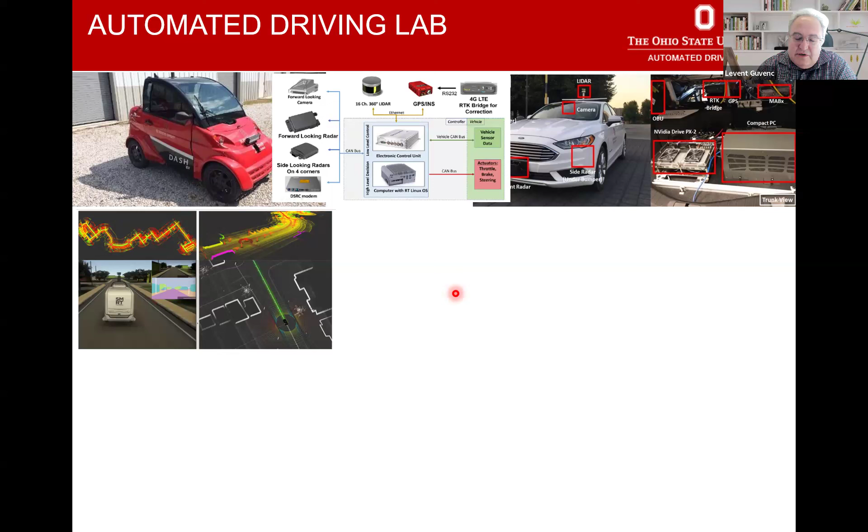Along with that work, we started building this vehicle in virtual environment method, which I'll talk about also in this presentation. We built hardware in the loop simulation systems like this one, which are innovative in that we add things like real traffic signal controllers, real onboard units, real roadside units, electronic horizon units, and the like into our simulations. We can actually play back real connected vehicles data or simulated connected vehicles data and insert our own connected and autonomous driving research vehicle inside that information and sense that information.

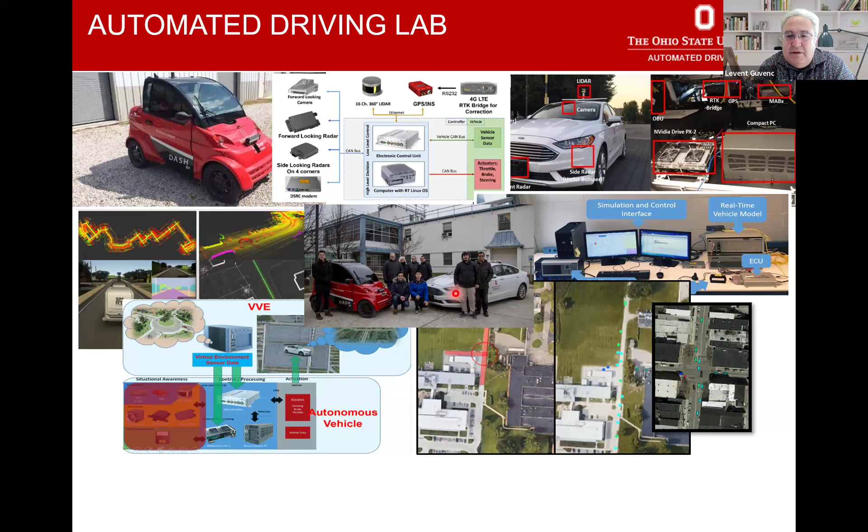There were a lot of graduate students and postdoctoral students, as you see some of them in the picture, and most of them are working either in academia or in industry. Accordingly, our work has been funded mostly by the industry and also federal sources.

So let me start with the motivation for today's talk. Vulnerable road users and vehicles share the road. We all share the road together. We have to improve our mobility, but there's a problem. Unfortunately, the injury and fatality rates of pedestrians and bicyclists has been in an increasing trend in the US for a long time. There are similar statistics worldwide.

So people are working, researchers are working on trying to actually improve the situation. And as you see right here, the trend has been increasing. There was a slight decrease based on preliminary data from 2023, but the decrease was not enough. We definitely want this decreasing trend to continue and at a much faster pace.

So what can we do about this? NHTSA, National Highway Traffic Safety Administration, has of course been posing the same question, and they've been analyzing crash data, and they've built this fatality analysis reporting system, FARS crash scenarios. On the left-hand side, you see the main causes of pedestrian crashes, and on the right-hand side, the main causes of bicyclist crashes.

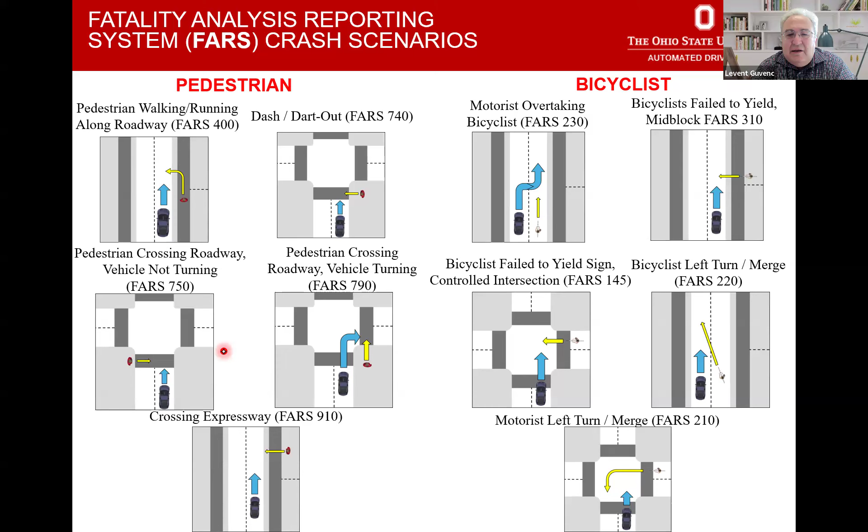So the first thing we did in our two projects that are related to this talk for the Safety 21 UTC were to actually create these scenarios in simulation settings such that we can actually simulate them and then use them for development and testing cases for our vulnerable road user safety algorithm. So we mostly concentrate on the pedestrian ones until now, and we have started working on the bicyclist ones in our second year project, which is the one that is current.

If we take a look at what is available today, pedestrian and bicyclist injuries and fatalities are increasing. Autonomous vehicles were seen many years ago, maybe at least a decade ago, as the solution, since driver error would be taken out of the loop and these kinds of accidents would not occur. But unfortunately that has not been the case, so more has to be done.

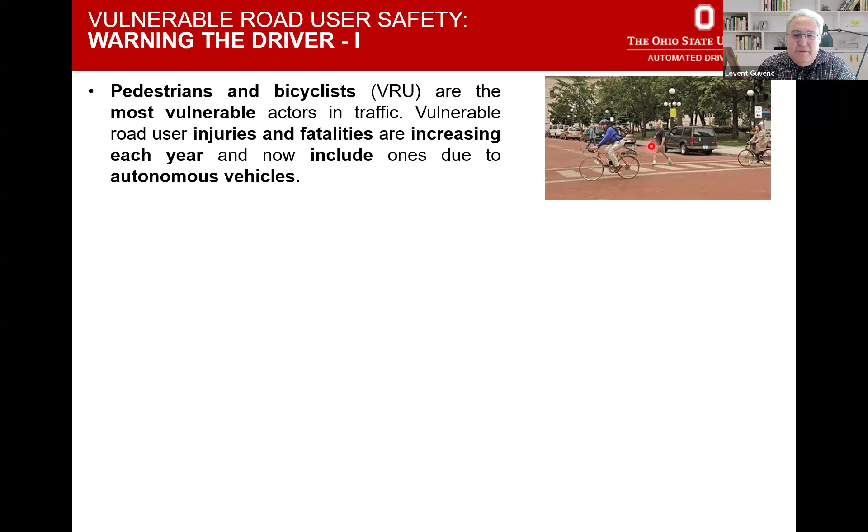Our vehicles actually come with some kind of emergency braking system. They have radar and camera that can detect pedestrians or bicyclists. But there are still cases in which these sensing capabilities do not work too well. So the question was, what can we do on top of what is available to help in improving the safety of vulnerable road users?

One problem was non-line of sight or reduced visibility conditions, where basically those available sensors do not help you too much. And it turns out these are usually a large percentage of crashes that result in fatalities.

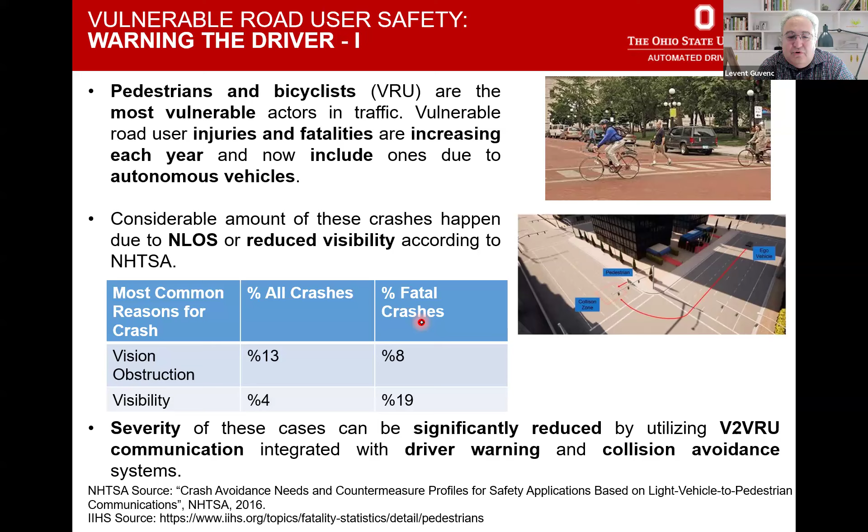So one idea is to add, on top of the sensors already available in your car, some kind of communication capability like vehicle to vulnerable road user communication, and use that to understand where the pedestrian or bicyclist is, or either warn the driver or warn the vehicle such that it could do a better job of braking or braking assisting. So this was the idea.

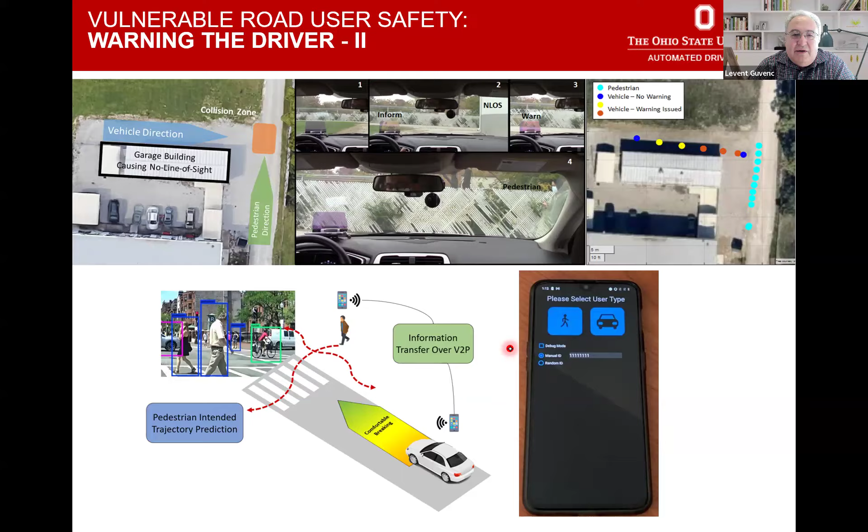Instead of trying to come up with new infrastructure, since almost everyone has a smartphone, use the smartphone of the pedestrian or bicyclist, and maybe the one of the driver, for the communication such that results can be achieved right away. So here's the idea: you have the pedestrian smartphone and the corresponding smartphone of the driver in the vehicle. They communicate, in this instance, over Bluetooth.

But the ideas I'm going to talk about are agnostic of the communication method. We also tried cellular communication. Colleagues we work with added modems to infrastructure like traffic lights, and then broadcasted the information from the pedestrian phone, which increased range. We also wrote directly to cloud servers and read from cloud servers. It turns out that all of these methods work fine.

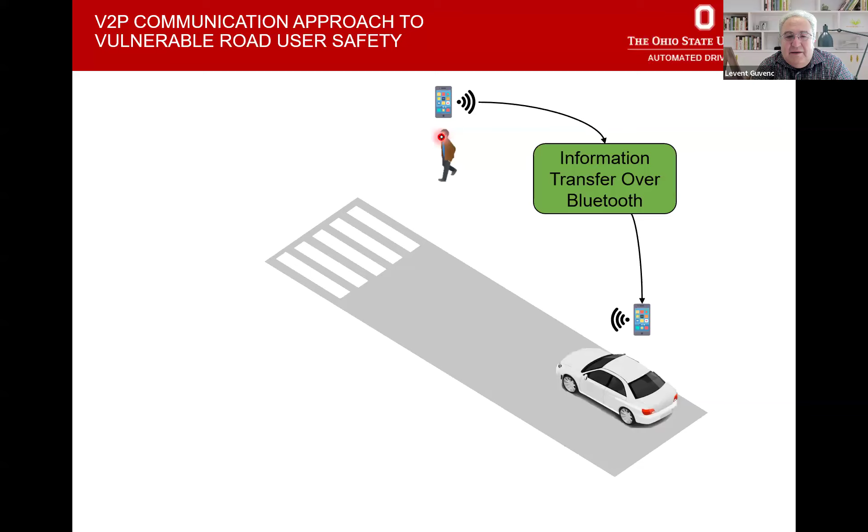The latencies are not big enough to affect performance. So basically, this communication between vulnerable road users and vehicles is not a bad idea. Then we need to somehow predict the path of the pedestrian or bicyclist, especially for pedestrians. This is a little bit tricky, whereas for the vehicle we usually know what it is going to do.

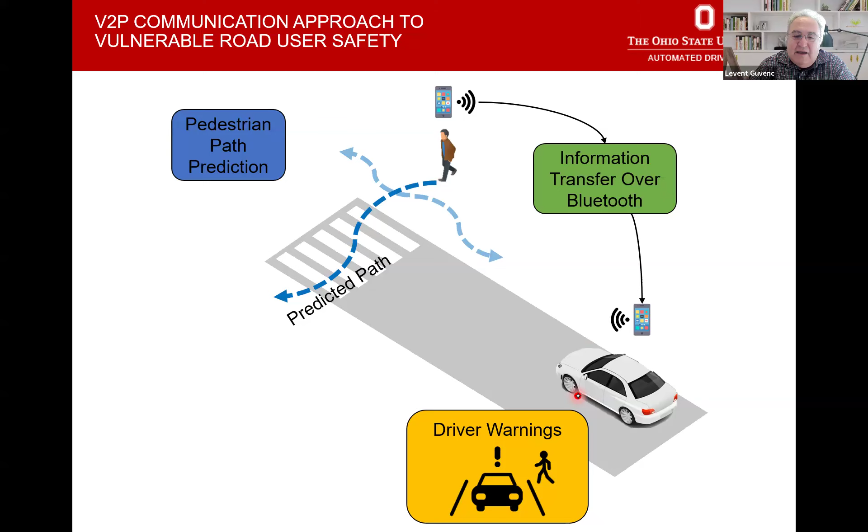Based on that communication and computations, we send warnings to the driver such that the vehicle can do comfortable braking. To be able to send the warnings at the correct time, or to do emergency braking more naturalistically, we take a look at real-world data for analysis of interactions between vulnerable road users and cars.

So let me go back to this Bluetooth idea. For the experiments, we used an Android phone, and we did a lot of experiments with different methods. Instead of just using this rather recent Bluetooth 5.x technology, which is much faster, we also looked at older Bluetooth because not everyone is going to have the latest kind of smartphone.

It turns out that even if the pedestrian or bicyclist is placing the smartphone in his or her pocket, which reduces range obviously, the numerical values are not bad. And technology is improving, so communication is not going to be that much of an issue. Here are some simple experiments to show that this idea could work.

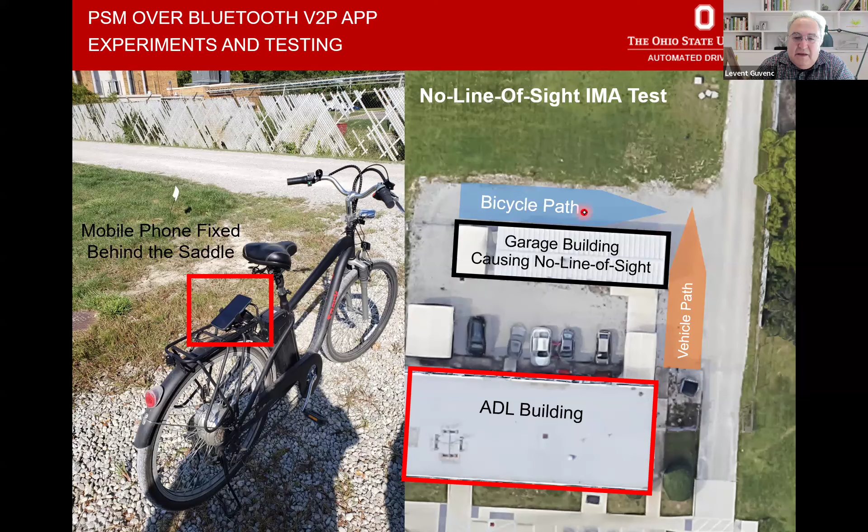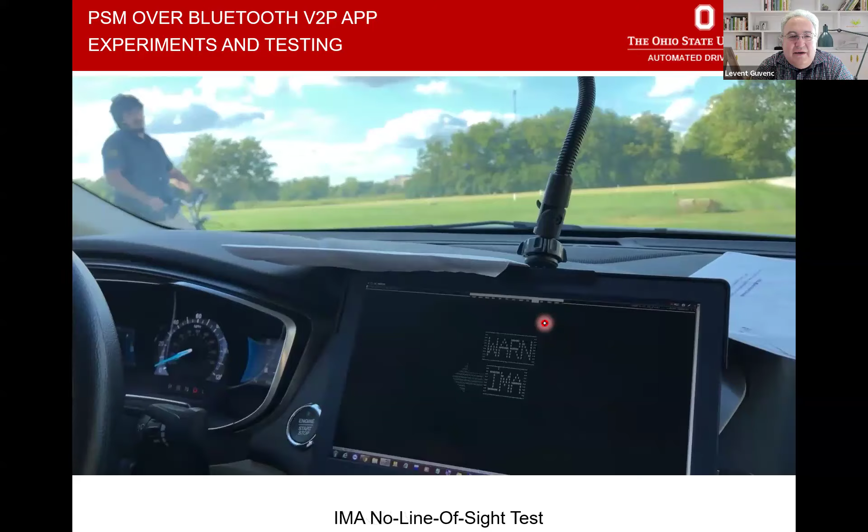At first, we used available connected vehicle applications like the intersection motion assist, in which the vehicle obviously does not see the pedestrian that's going to appear from the left side of that building. There is going to be a warning which you should see, and obviously a collision is going to be avoided. This is a non-line of sight case.

Then you can also do line of sight cases at a larger distance, where the bicyclist will be coming from a longer distance. Again, your sensors might have some difficulty because that bicyclist or pedestrian is a long way away. Same intersection motion assist scenario.

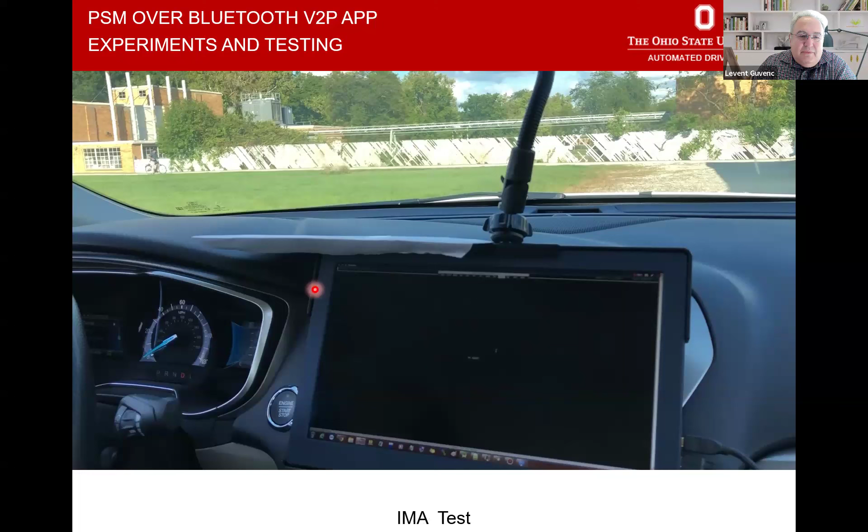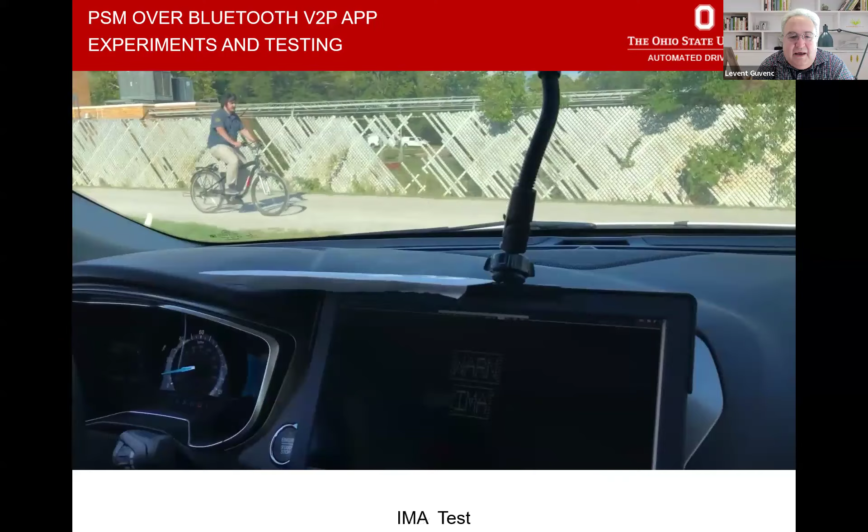So basically, it's the same scenario. You might barely see the bicyclist on the left corner, and then there is going to be a warning flashing. And if you don't want a warning, you can actually connect that warning to an emergency braking system.

So that's the idea. We did not want to just use existing algorithms. The intersection motion assist algorithm is an existing algorithm from the connected vehicles database, but we wanted to build our own algorithms. We also wanted to use some very basic learning control.

So we had to collect data, and what better way than to use this smartphone right here. Either the pedestrian or bicyclist has it, or you can put it in the car, and that can be determined automatically. It turns out your phone has a ton of sensors, like a very good GPS sensor, IMU sensor, and others, so you can collect data. This is an actual pedestrian moving around, and I use that data for later analysis and also for training neural networks.

So we decided to test both a Kalman filter and some very simple neural networks, long short-term memory networks, which turn out to be what most people use, especially for future motion prediction of pedestrians. We used a 1 second ahead prediction and a 2 second ahead prediction. Why did we use such simple algorithms? Because we wanted to make sure we could implement them on the smartphone.

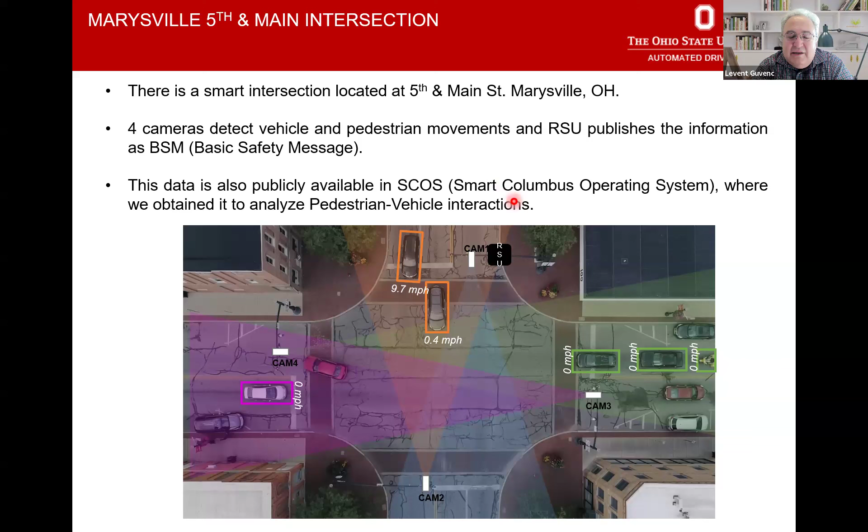So we could go there, and we did this, listen to this broadcast with our car, and collect the data. And it turned out that the city had actually collected about 9 months of data, which was made publicly available.

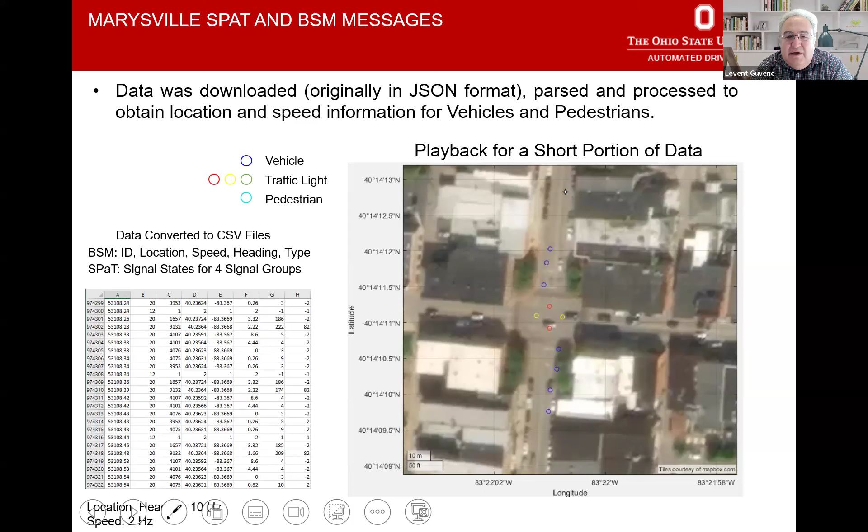And then we decided to actually analyze the data. Obviously, 9 months of connected vehicles data is a lot, 24 hours a day for 9 months. So we had to write some semi-automatic or automatic tools to extract the close vehicle and vulnerable road user interactions. This is from August, this is from September.

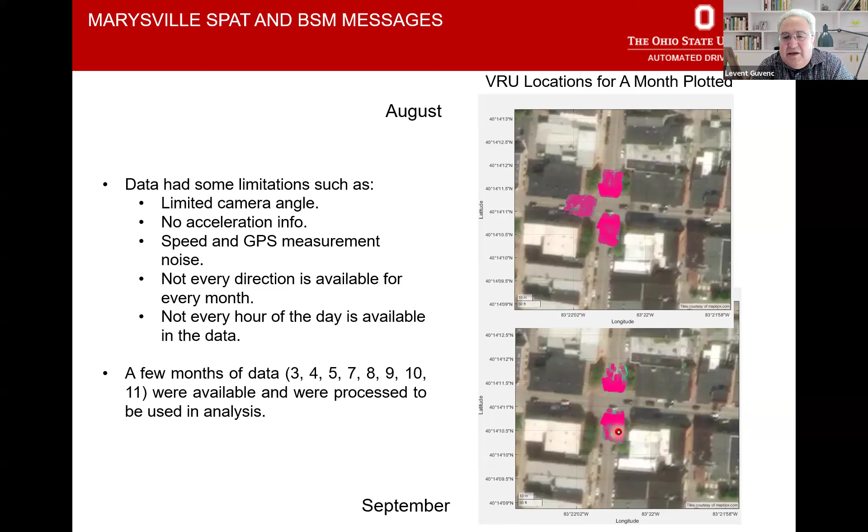These are the areas where this vulnerable road user and vehicle interaction is taking place, the ones close enough to being dangerous. Obviously, no accidents happened during that time frame.

And then we decided to analyze the data. So we drew this data on plots where we have vehicle time to zone and pedestrian time to zone. This means the intersection is the zone, the critical zone. If the pedestrian and the vehicle are at the same time, meaning the origin at the zone, that means they're either colliding or almost on top of each other. So basically, you need to be away from this range.

And if you actually plot the data like this, it looks like garbage, but if you use heat maps, you'll find out that most drivers actually give about 2 seconds of time gap when they see a pedestrian close to an intersection.

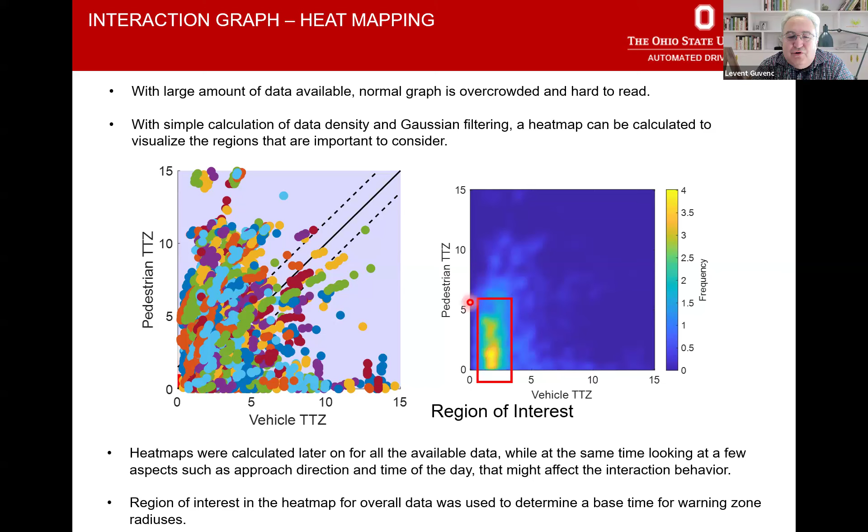So this is naturalistic data. This tells us how actual drivers like to behave, which is more cautious, and that's the majority of drivers. If you are to build a driver warning system, or a system that will do automatic braking and steering, we have to use something like this. We should not really be closer than this to pedestrians.

Usually in straight portions of this, it's very easy to predict the future path. It's the parts where the pedestrian is changing direction where the difficulty arises. And this seems to be doing a satisfactory job. Obviously, there are going to be some errors when you are doing those turns, but eventually, in a short time, this catches up.

So that part of the work made sense. We also said, instead of only doing motion prediction, let's try to take a look at behavior or intent prediction. This is one method, we tried lots of different methods. It's like, what is the pedestrian trying to do at the next instance? So we used, of course, our ground truth, and our confidence levels were pretty good when we trained our neural network based on that also.

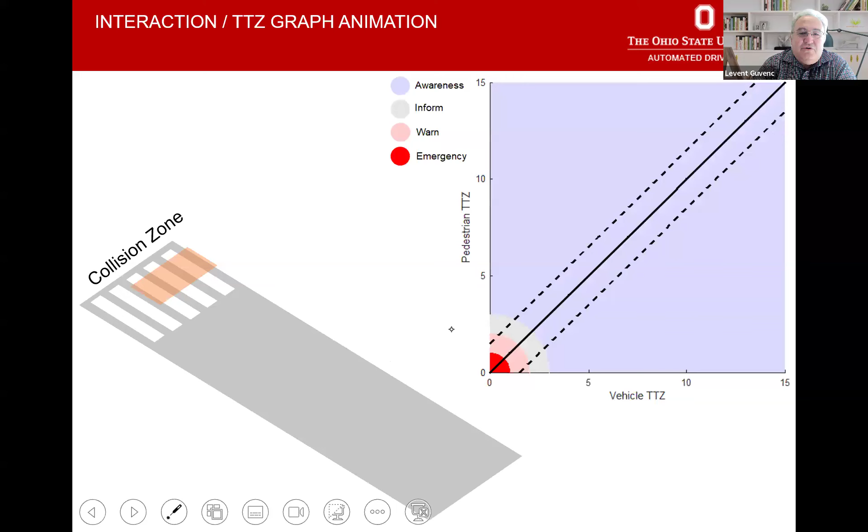So this is how a driver warning system can be structured, and then obviously can be used for automated braking and automated braking and steering. This is the zone where there could be a collision between a pedestrian and a vehicle.

So basically, first you need to be aware that there's a pedestrian that's moving in that direction, which would be around here. And if you, well, this region, around here, you need to inform the vehicle that something is going on, and of course the driver, and it would correspond to this point in this pedestrian time to zone, vehicle time to zone graph. And the time to zone is how much time you have into that collision zone.

And eventually at that point, you have to actually fully brake the vehicle such that your interaction is in a safe zone and not in one of these areas, definitely not in the red zone where you have to apply emergency braking. So the idea is to make sure that you are completely safe and you don't really need to revert to emergency braking. If these fail, then you need to do emergency braking, and maybe emergency braking and steering.

And this is how we simulate. You actually see that this point of interaction moves towards the origin as the vehicle and the pedestrian move. But then right at that point where they're almost on top of each other, the vehicle stops. So basically you move out of this zone right here.

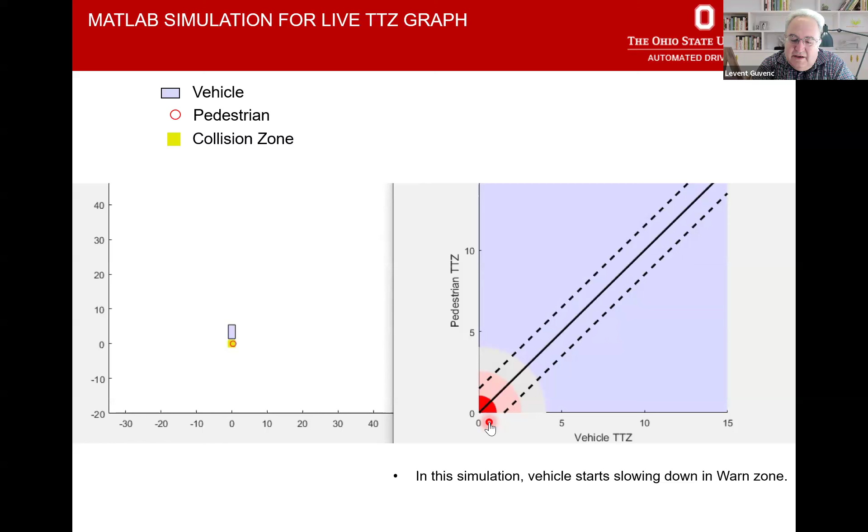And I'm showing this program because this is how we analyzed also real data. So we did have access to 2 days of tryouts along with all the data we had, where there were 6 vehicles, about a large number of pedestrians, bicyclists, scooters, driving around all the time. And then, yes, we were able to take a look at all the problems with the approach.

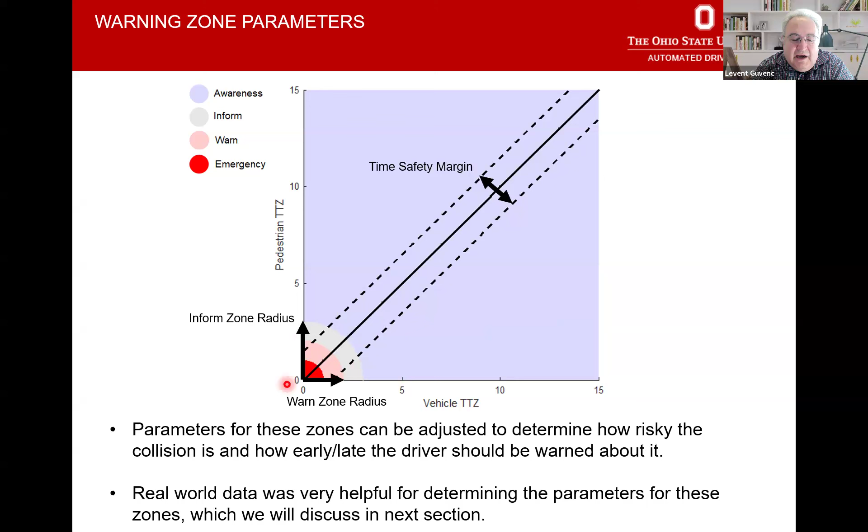And to be able to do a good job, basically, you also need to put some safety margins. Basically, what's happening as the pedestrian and vehicles are approaching an intersection or a crosswalk is that you actually move along this path. Someone has to do something, which is usually braking and steering, so the vehicle will brake, steer, and you will end up here without going into these dangerous zones right here. So that's the idea. And of course, this was implemented.

We were working with a major automotive OEM at the time, and of course, being a major OEM, they were able to put all these warnings, etc., in the dashboard. We are a university, which this is not possible for us. So what we did is we took a heads-up display, and we put the smartphone in the vehicle such that we could show the inform and warn zones, and the computations were taken care of in the smartphone for this instance.

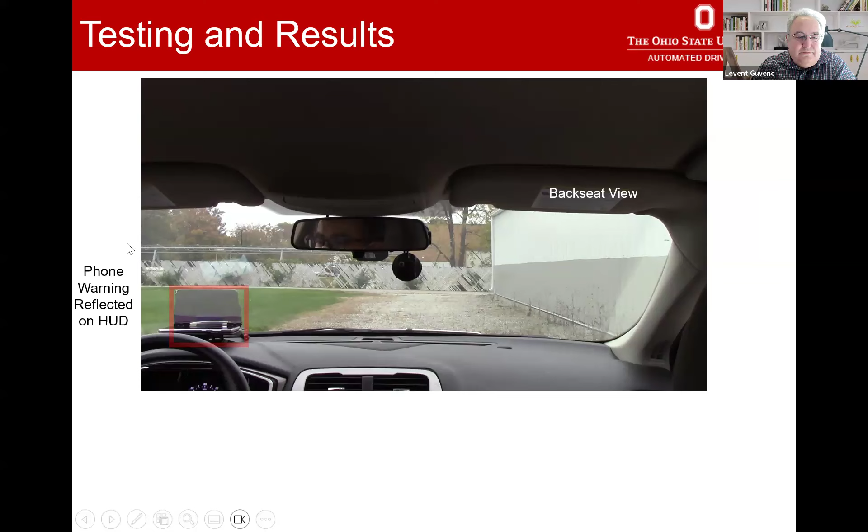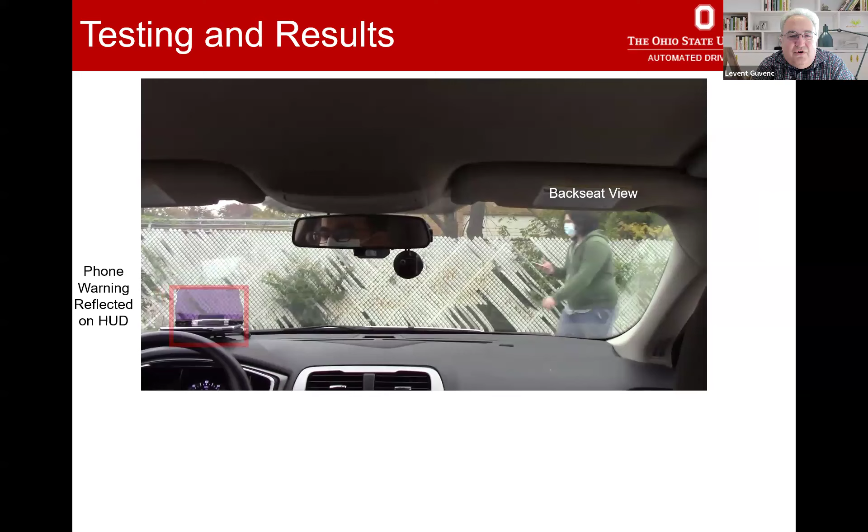So this is one of the demonstrations where you see the heads-up display. In the videos, it doesn't show very well. That's where we try to show. So it starts blinking and it changes color. It warns that there is a pedestrian coming from the non-line of sight place right across the building there.

Same with 2 different views. And of course, you have to note that these are a little bit dangerous. Obviously, we know what's going to happen, but you have to be careful in doing things like this. And here you see the data analysis and the different warnings that are being sent as this experiment is taking place. And of course, you see the end of the experiment also.

But if you want to continue with this, obviously, you'll note this is for a bicyclist case, that the bicyclist, the pedestrian, and the vehicle, they're coming pretty close to each other.

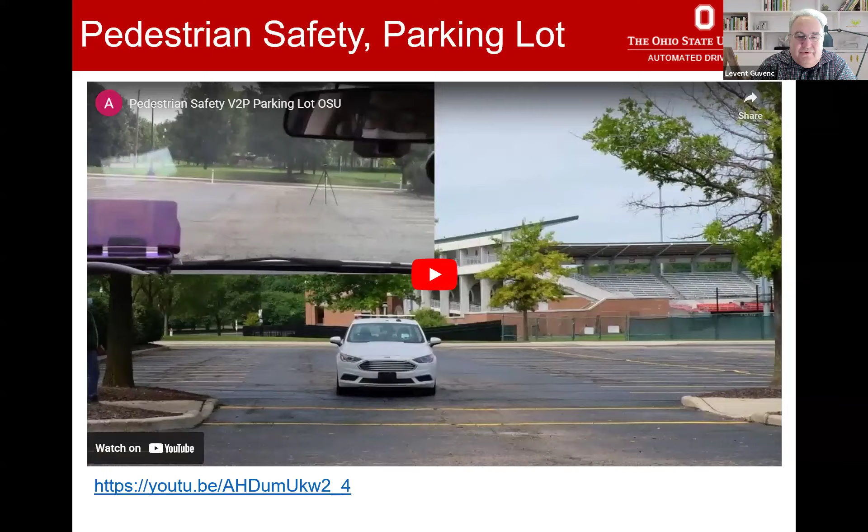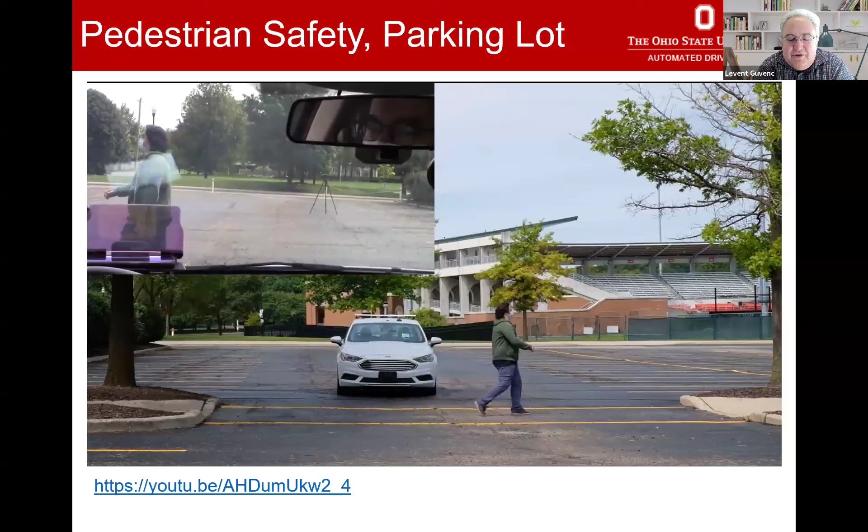So I have a couple other videos where we can see the same thing at intersections, real intersections at the university, and the vehicle is stopping. Of course, the pedestrian does not really want to jump in front of the car for safety reasons. This is a similar demonstration at a more commonly used road at Ohio State University, and this is the interaction.

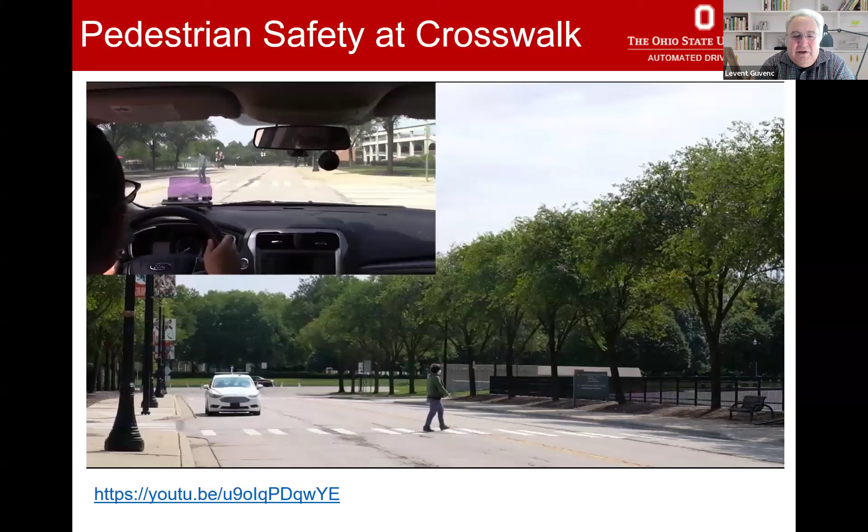So the question is, we don't want to just do warnings. We want to take a look at braking and steering, and even for these warnings, we want to come up with safer interactions, especially if you want to experiment. So if you want to develop in a safe environment, the first part is we start with model-in-the-loop simulations.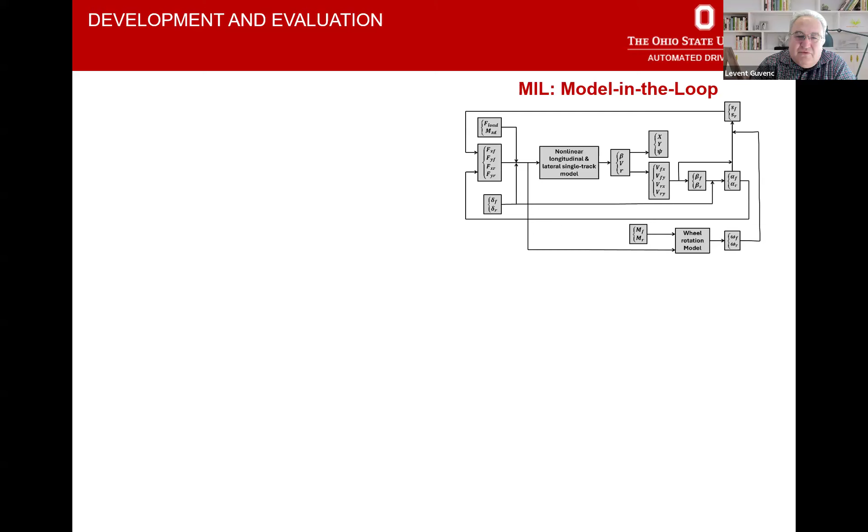Which is what we do most of the time. Then we build hardware-in-the-loop simulation setups like this one, where we also have communication between the vulnerable road user and the car in real time happening in this system. We try to add realistic traffic, which is also safe.

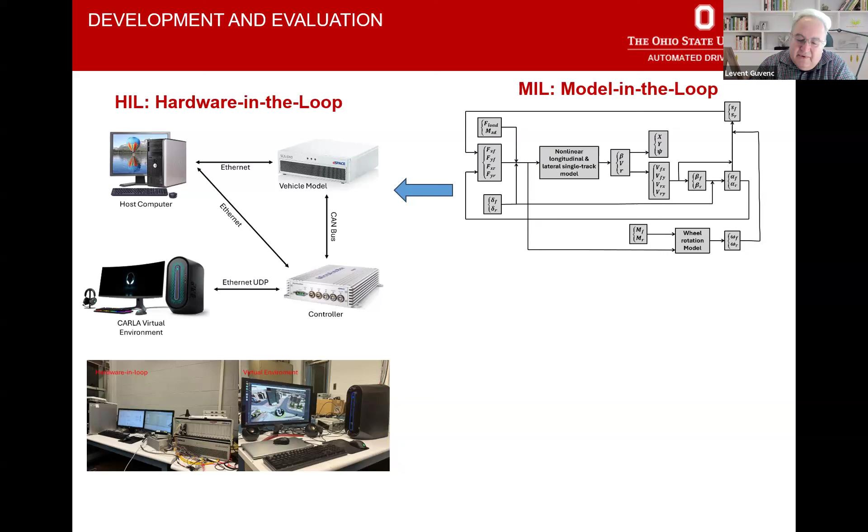And then the next level is, well, it's not very safe to actually put the pedestrian in front of the vehicle at all times. It's not very safe to do a couple of test runs in a proving ground and then just deploy technology in real life situations like a lot of companies are doing. We should do something in between. That's the vehicle in virtual environment method that I started during the beginning of my talk.

So this is what the method is about. This is on developing and testing or demonstrating connected and autonomous vehicle technology in a safe manner. We actually take our vehicle, put it in a proving ground, empty area, or in our case, in a large parking lot, which is empty.

And then we cut off all the sensor feeds. It's as if this vehicle has extended reality or virtual reality glasses, because we run in real time a realistic simulation of driving in a replica of the real world. This one right here is the Linden area in Columbus where autonomous shuttles were operating. And then basically all the feeds that go to your computers are from the virtual environment. The computer calculates the drive-by-wire commands, and then the vehicle moves in that environment.

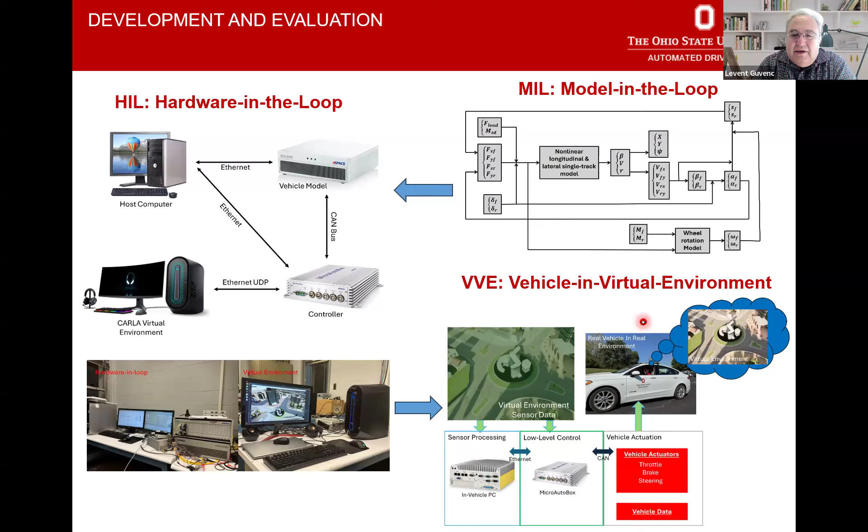So basically, if you want to do this, we need to make sure that however much you move in the virtual environment and your real motions are the same. So the vehicle in the test actually thinks it is driving in this environment, whereas it's in a parking lot, and you see that in this case, the parking lot had vehicles.

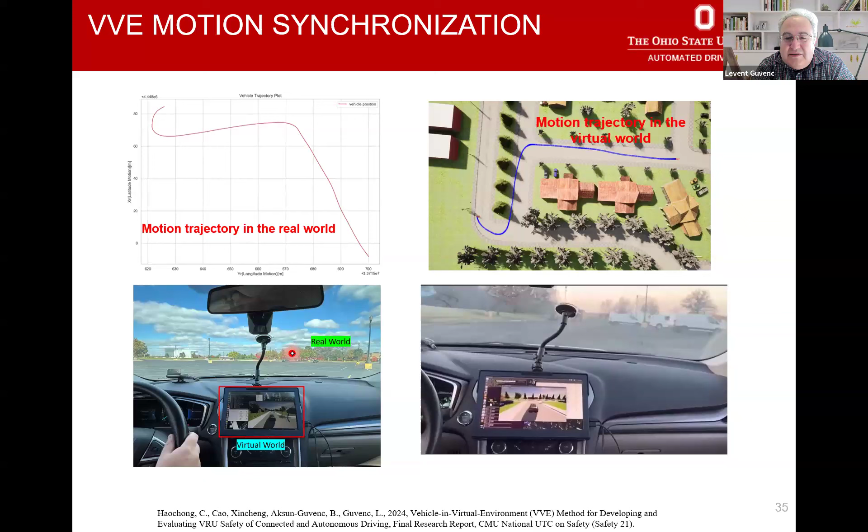In the virtual environment, it's actually overtaking a vehicle, as you see in the bottom right corner, but in the parking lot, it's not, it's just empty. And of course, this was an OSU, Ohio State University parking lot with vehicles. We usually go to another parking lot with very large flat areas, so we don't really see other cars.

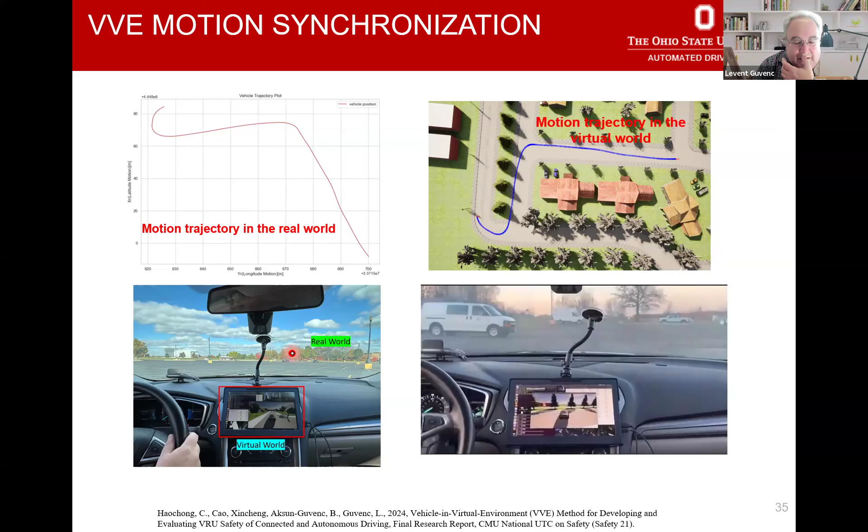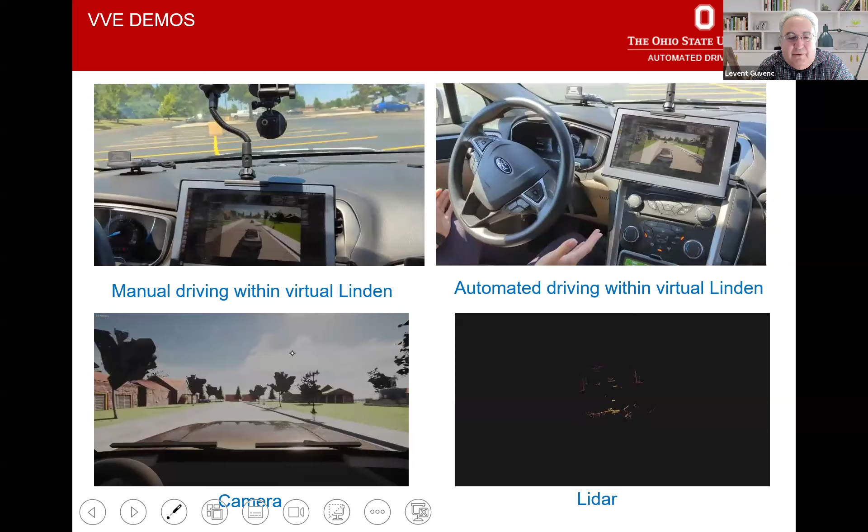And it turns out after we did all the coordinate transformations and so on, how much we move in the virtual world and how much we move in the real world are very nicely synchronized. And then basically, once you do this, you can do manual driving on the left, you can do autonomous driving on the right, and you can get sensor feeds from the virtual environment like camera, LiDAR, or other virtual feeds.

So how is this going to help us? That method was developed for basically developing, evaluating, and demonstrating connected and autonomous driving algorithms before public road deployment, and then you could actually take a look at critical situations, like cars jumping in front of you and so on. So the way this could help is you can actually have multiple users.

Like this is your car. That's a user sharing the same virtual environment. And this is your pedestrian or bicyclist. You can even have other cars. They actually communicate their location information to the simulation, which is running in real time, such that this vehicle corresponds to the motion of this car. The pedestrian motion is given by the real pedestrian.

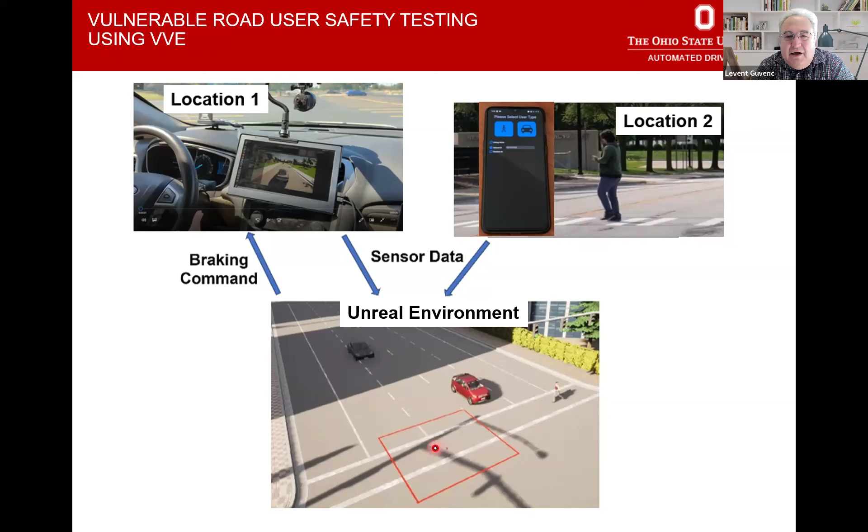And there is no possibility of physical collision because they're at separate locations, usually close by, but they don't need to be. They can be physically separated. They can be communicating through other means. But realistically, in the virtual environment, there's going to be a collision risk. So here you can even collide virtually, whereas nothing happens in the real world. And this is the method we are applying. So basically, your real pedestrian and your real vehicle are doing real motion somewhere else.

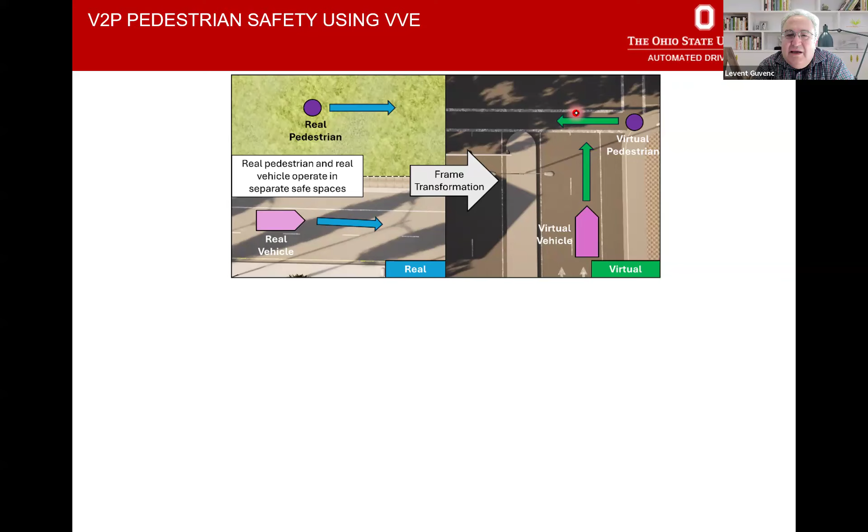You actually sync the motions, do frame transformations such that your virtual pedestrian and virtual vehicle are in any of the 10 cases—the 5 pedestrian cases and the 5 bicyclist cases that I showed you in the beginning—such that we can realistically implement this in our car, where all the computations are done right in the computers in the car.

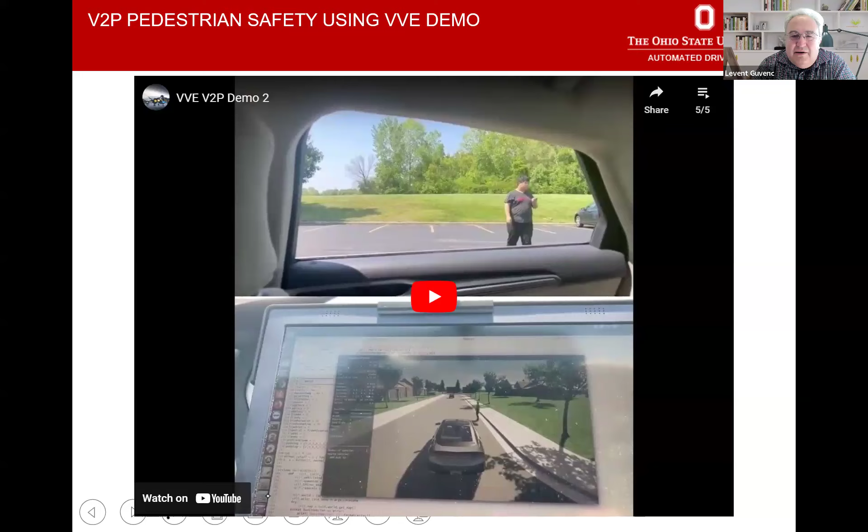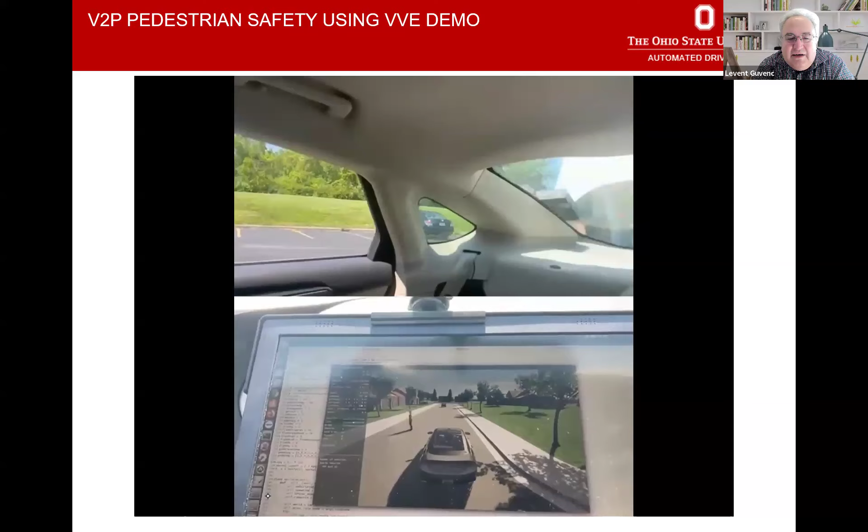This is a simple demonstration of how this might look. The graduate student working on the project is actually walking behind the car, whereas in the simulation you'll see that he's actually walking in front of the car. This shows that we can do these kinds of interactions easily.

So next point, we do have automatic emergency braking in cars. About 90% of today's light vehicles already have this, but it's not good enough—it's very basic. NHTSA, the government, found out about this and said, well, we want to make things safer.

So they came up with a revised version of the standard, which is going to be mandated by the year 2029. First, you have to detect vulnerable road users better—pedestrians and cyclists—since there are problems with determining where they are, detection and tracking, even under low visibility or nighttime driving.

The next thing is the speeds have been increased—for collisions with cars, up to 62 miles per hour; for collisions with pedestrians, up to 45 miles per hour, if I remember correctly. So the speeds are much higher, and these systems have to perform much better than the ones that currently exist.

This is a requirement because we want to reduce the number of accidents, and this is how we actually test these automated braking systems—using dummies on test tracks and proving grounds. We'll continue doing this, but we need better sensing of vulnerable road users—if you have communication capability on top of LiDAR, radar, and camera, that's going to be useful.

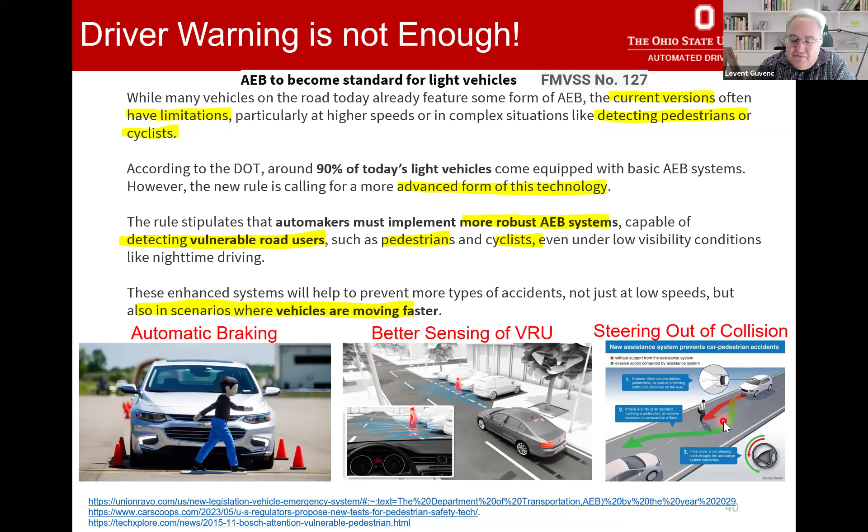So basically, your collision avoidance methods should concentrate on braking plus steering. Our lab has been doing a lot of work on these technologies for a long time—collision avoidance systems for vulnerable road users. Professor Aksun Güvenç in our group has been working on this elastic band method for a long time, based on the potential field approach borrowed from mobile robotics.

You think of your path as a band which you deform in case you have an obstacle, and then try to do this more optimally. Other people have used things like support vector machines, neural networks, reinforcement learning, or deep reinforcement learning. This part is what we are currently doing in our first and second year—well, we finished the first year, but it's ongoing in our second year UTC project.

Along with that, we're also looking at more classical approaches dealing with how we follow the path. In reinforcement learning this is done automatically, but with other methods used for benchmarking, once we find the deformed path, how do we follow it? We use what's called a disturbance observer or model regulator, which rejects the curvature of the path, meaning we follow the path very accurately.

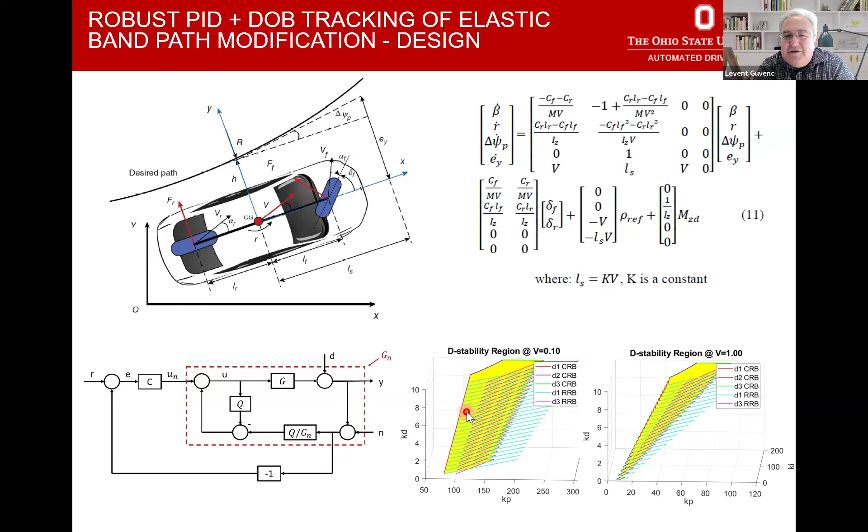On top of this, we add a feedback controller, which we design using parameter space methods. This approach has worked well. Here you see trajectories—difficult to see because of the shadow of the buildings, but there's a red trajectory showing a collision avoidance path with an obstacle. This is the exaggerated view.

On the right-hand side, you see what happens with different amounts of communication delay—this could be communication plus computational delay. The performance isn't very bad. So this is also what we're looking at: what if we're not under ideal situations in practical implementations? Are we still going to be able to do that?

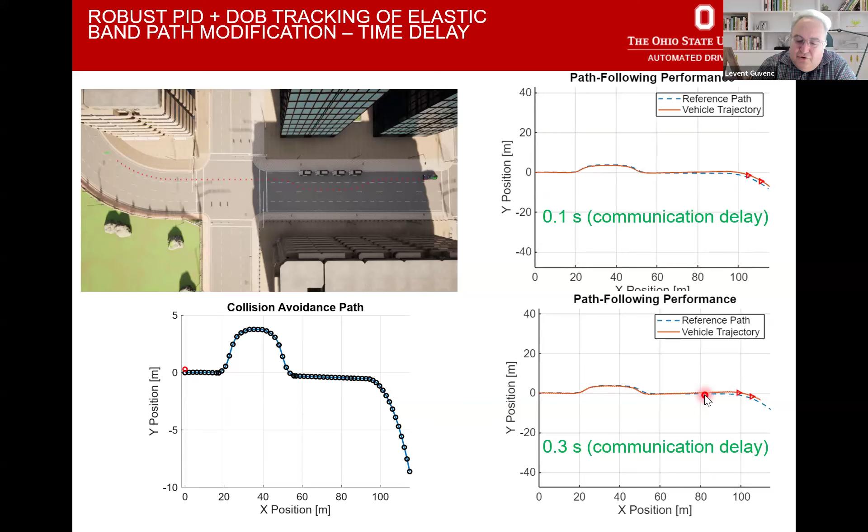The other approach, the main approach of our UTC Safety 21 project, is applying reinforcement learning algorithms. So basically, you see the reinforcement learning algorithm here with this deep reinforcement learning implementation.

The vehicle is not just trying to stop, but it's also trying to actually pass the pedestrian. After training the network, this is the pedestrian time to zone, and this is the vehicle time to zone. Obviously we don't want to be here, we don't even want to get into these regions, definitely not this emergency region. So once the vehicle starts, it's going to steer and brake until there is no possibility of contact with the pedestrian. It will have overtaken the pedestrian safely. All of these have been published recently.

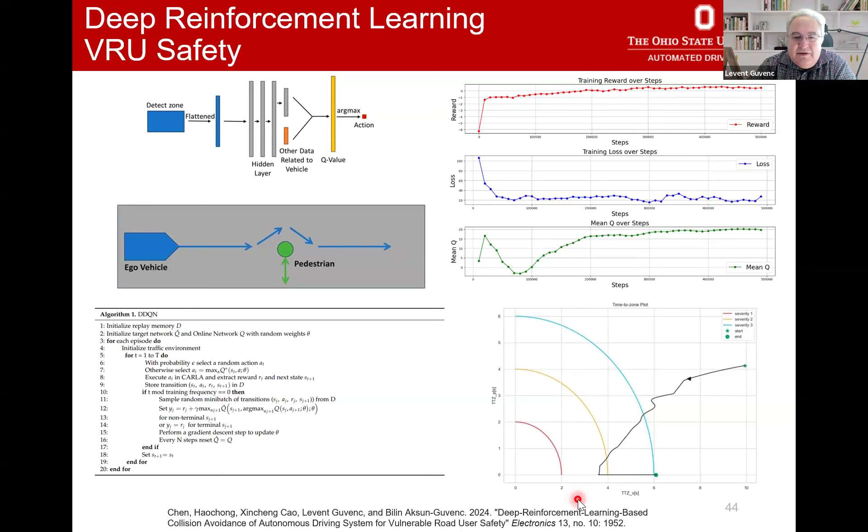This is a preview of our proposed next year project. Professor Aksun-Guvenc and our students have started working on this already. This one uses control Lyapunov functions and control barrier functions for the basic motions, and there's a higher level deep reinforcement learning approach that tells you where you want to go. Once this is determined for one step, made in steps, the CLF-CBF approach tries to find a safe trajectory, the safe controls that will get you to the next point without any collision risk. This is how it's done. There are some preliminary results, published very recently, showing with static vulnerable road users how the path is changing, and also with dynamic vulnerable road users.

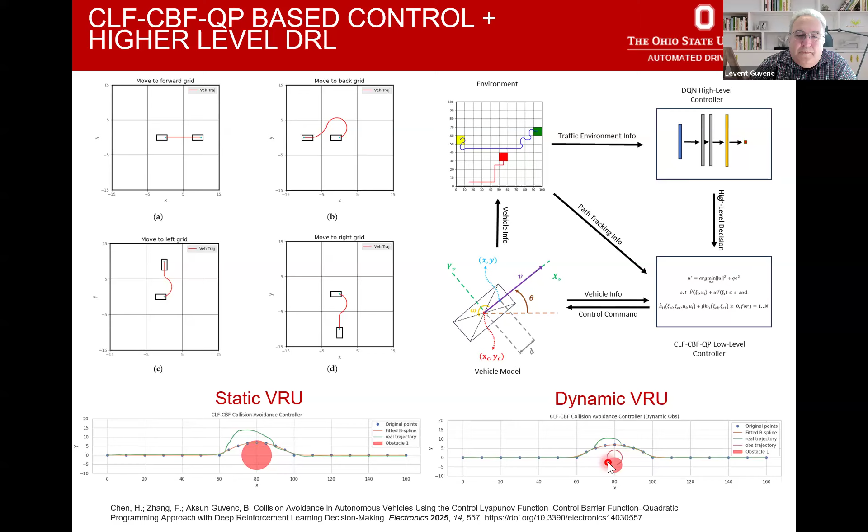There are a lot of things you can do, using connectivity and automation in the car such that it is safe in its interactions with vulnerable road users — that's basically the research problem we are taking a look at. There's a lot to be done, but we all have to approach it; this should be the main goal. So this ends the presentation. These are the contact information, and I'll stop at this slide right here.

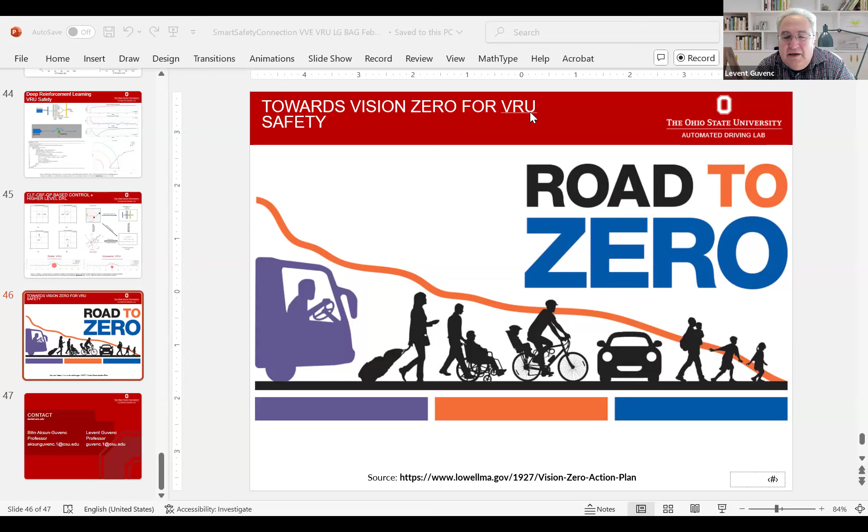To answer your question, I think driver warnings will be useful but not good enough, because in those situations you don't really expect any close interaction - they are rare instances - which means it should be an automatic system. In that case, this kind of approach would make sense. Along with your usual perception sensors, if there was also communication using smartphones, we would be able to know about that rare instance very easily. The car should be listening and trying to see if there is an interaction all the time. In those cases, automatic braking would be more suitable, because the driver would not expect that, and we have reaction times sometimes up to a couple seconds. Sometimes we don't even cognitively recognize the dangerous situation until after it's over. So in those cases, I would recommend definitely using an automatic system to help.

Thank you. Are there any other questions? Okay.